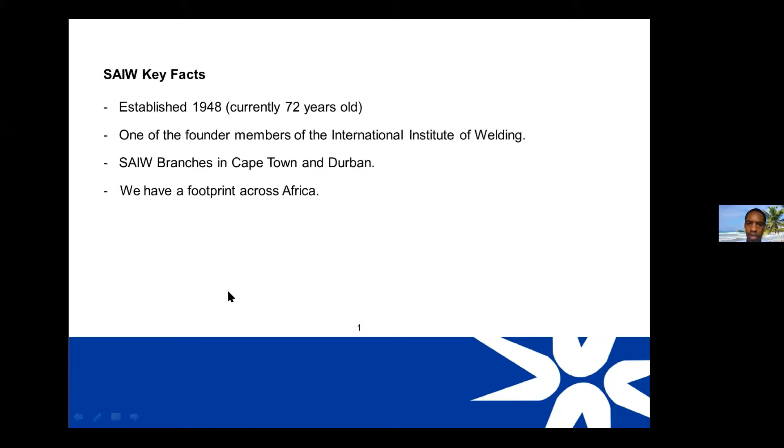Welding is basically a process where we are joining materials together, and depending on the situation or circumstances, it can be the same material or it can be different materials.

A number of products are produced in petrochemical plants, so different processes actually take place. Some of them require high temperatures, others require a low temperature, for those particular reactions to occur.

As such, the materials that are needed have to be appropriate for those particular operating conditions. And further to it, the chemicals themselves also have an effect on the material, because the chemical processes take place within pieces of equipment. So all these are things that have to be taken into account. When you start to weld, or when you're planning on welding any piece of equipment, you have to be aware of where you're going to make use of it.

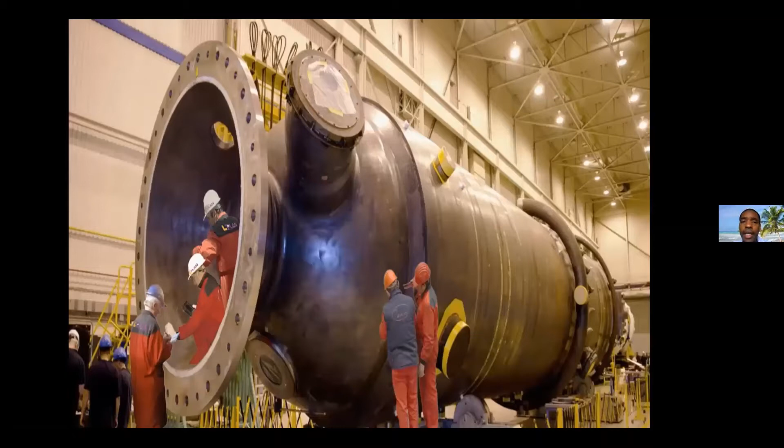If you think back in terms of the power plant and the petrochemical plants that I was showing you, all those are basically made up of various pieces of equipment which are built as a single unit and then connected together to form the entire plant, as I was illustrating earlier. So there's a lot of welding that takes place in workshops and manufacturing companies, and then they ship out those pieces of equipment to the different locations for use.

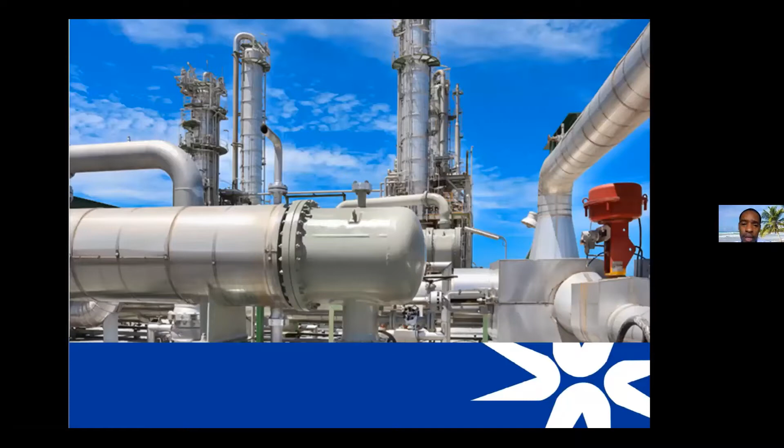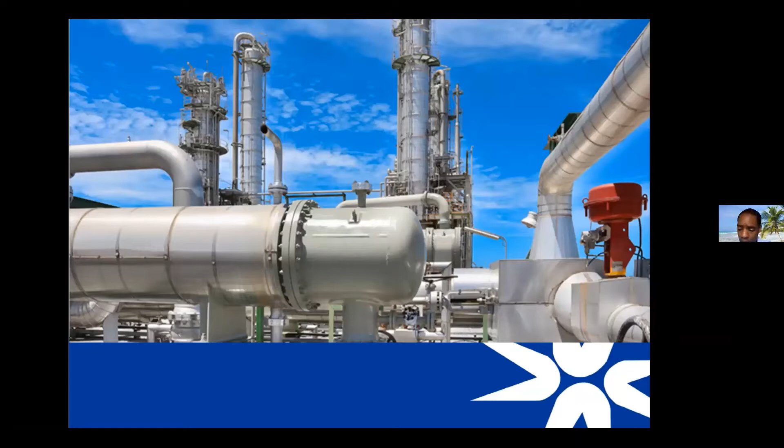If we zoom in a bit more into the petrochemical plant, you can see there is an illustration of a smaller piece of equipment that is connected to other pieces of equipment. And if I give you an X-ray view of this particular unit, this is what it would basically look like.

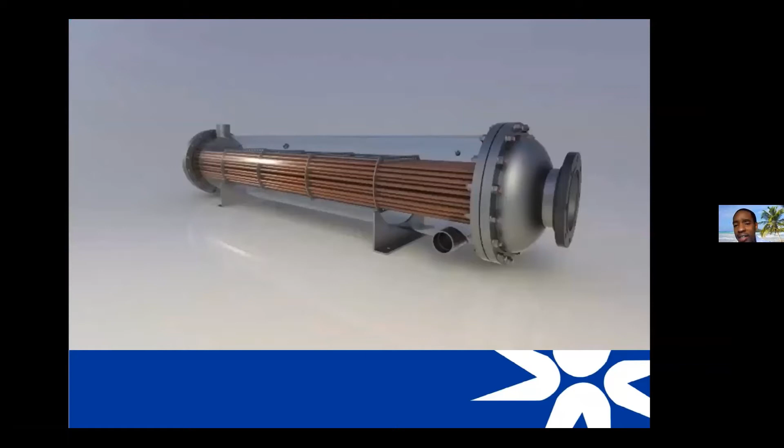As you can see, there's actually tubes inside. It's called a heat exchanger. And you'll find that with some of these pieces of equipment that are manufactured using welding, there are other bits of equipment which will also be inside the big unit itself.

So it means when you manufacture those various pieces of equipment, you need to know exactly what you are doing. You need to apply the relevant standards, you have to have an understanding of the materials, and you have to know exactly what needs to be checked to ensure that you've manufactured everything correctly.

In the motor industry as well, all those different cars that you drive, there's some welding that actually takes place there as well.

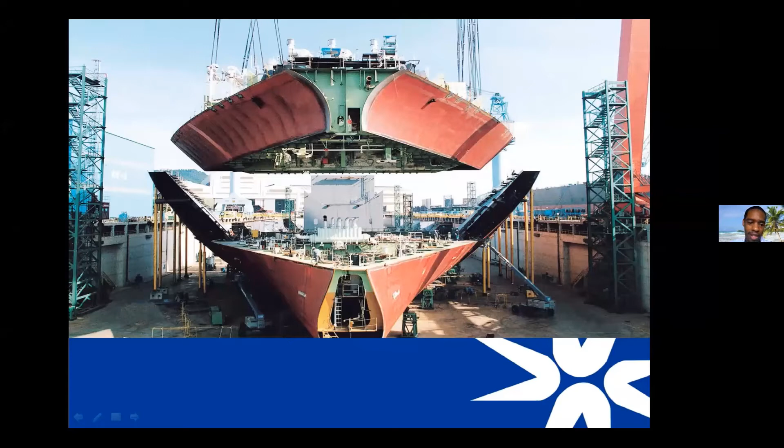This thing won't move. My slide doesn't want to move forward. Just give me a minute to try and get this going. Okay, I'll skip. All right, there we go.

So besides the transport sector, also when you look at buildings and structures in the structural industry, welding is used to manufacture some of these structures. When we think of structures, quite often you'll be thinking of a simple shed on a farm, but structures can be very complex, and there is a lot of danger in a structure not being made to the relevant standards, such that if something were to go wrong and that building were to come down, a lot of people would be hurt and killed. So welding becomes very critical. It has to be highly regulated to ensure that the products being manufactured meet the relevant standard and quality levels.

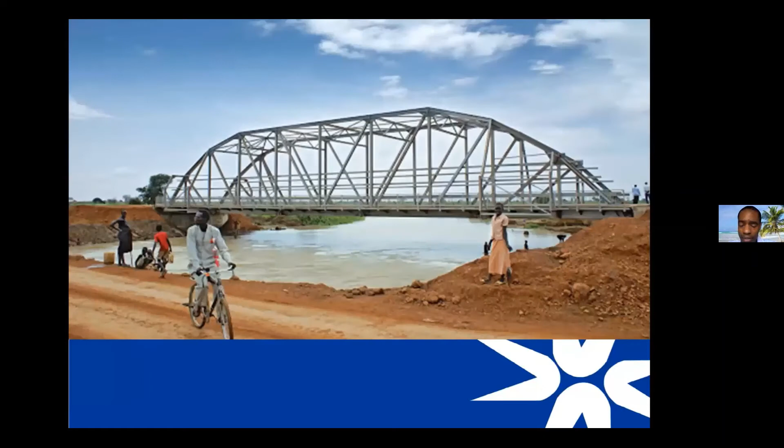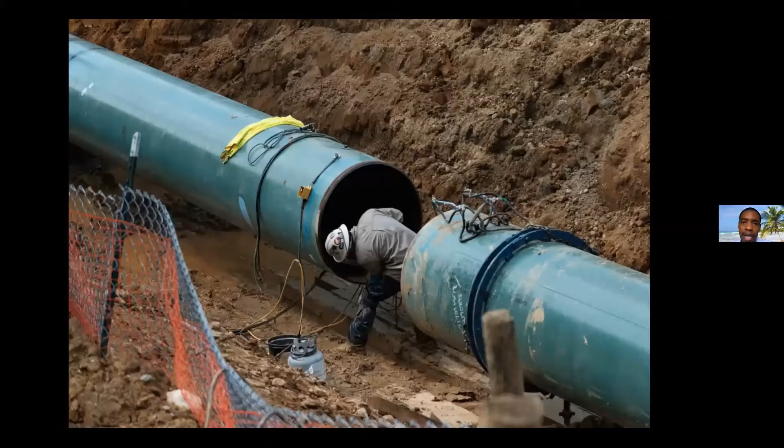Another example of a structure is a bridge that we've got here, made out of steel. And then again, we also use welding in the manufacture of pipelines. The great thing about this image is it brings to light another phenomenon related to welding, which is that we don't always weld inside a workshop. At times you can weld out there in the bush, like this example with the pipeline, where the guys are welding out on site.

So that basically is some examples of where welding can be used, or areas where you can find yourself working if you are involved in welding. And then in the field of welding, there are a number of options in terms of careers that people can actually pursue.

Before we delve more into the different options, I want to have a quick discussion. I talked about the petrochemical plant, where we were talking of the different temperatures, pressures, and chemical constituents that have to react within those pieces of equipment. So for all of that, you need engineers or designers, the ladies and gentlemen who will put a concept onto paper, and then that concept, or the drawings, the design, is handed down to a group of guys called the coordinators.

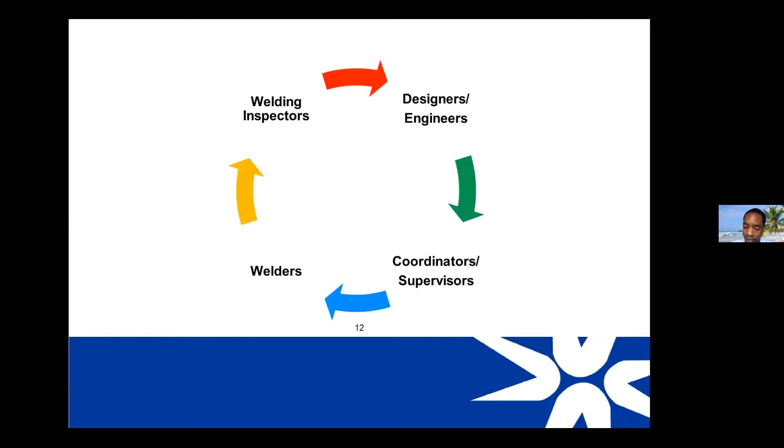So moving forward, I'll start off with the welding inspectors. At SAIW, we offer the welding level 1 and level 2 welding and fabrication inspectors. These guys' responsibility, as I've just been explaining, is to double check that everything has been done correctly.

They are more or less like a third party, an independent body that comes to say you have indeed complied with the requirements. And if things are falling short, they will also help you identify where you've fallen short and what corrections need to be made.

Okay, and we also have got an IIW qualification, which is the comprehensive level. It's also within the field of welding inspection.

And we also have got paint inspectors. With all those pieces of equipment which were manufactured, as you saw with some of the images, they're painted. So the quality of painting has to be right for the purpose of preserving those pieces of equipment from deterioration. The environments bring about things like corrosion, so you want to see to it that your pieces of equipment do not degrade much faster. They tend to have a lifespan that has been designed or built into them, so you want to guarantee that lifespan by putting up protective measures such as paint.

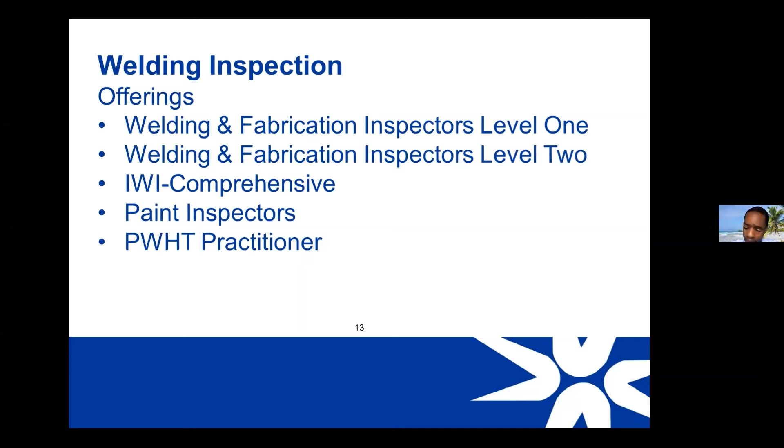Though you don't check for some of these things right at the end. I mean, it's a process. You start with it before the manufacturing actually takes place - that's where you go and check and verify.

Again, you want to see to it that the welders themselves are competent for the work that they are doing, so you want to see that they are qualified. And that qualification comes with its own restrictions. Being a qualified welder does not mean that you can go and weld up anything - there are limitations. The limitation can basically be the thickness that you can weld, or in terms of the material that you can weld, or the particular process itself that you can weld using. So those are all areas that the welding inspector goes to check and see that everything's been done correctly.

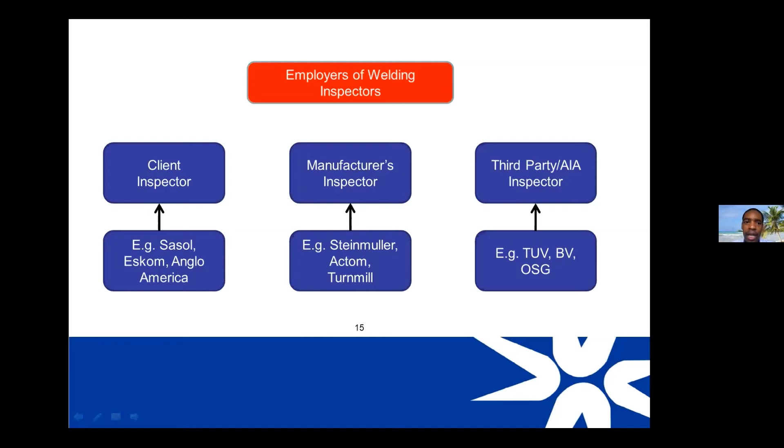And then you've got other processes like gas metal arc welding, which uses a continuous wire. It's a semi-automated process. The wire is fed by the welding machine, and it is the job of the welder to locate the arc in the right place within the groove, and to traverse along the groove at the right speed in order to deposit a weld of good quality, consistent thickness, consistent height and width.

And then you also have other processes like gas tungsten arc welding. We typically use this process for producing high quality welds, a typical example being small diameter piping and small thicknesses. It is ideal for depositing what we call the root run, which is the first layer of weld that we deposit when joining two materials together. The weld produced using this process tends to be of superior quality.

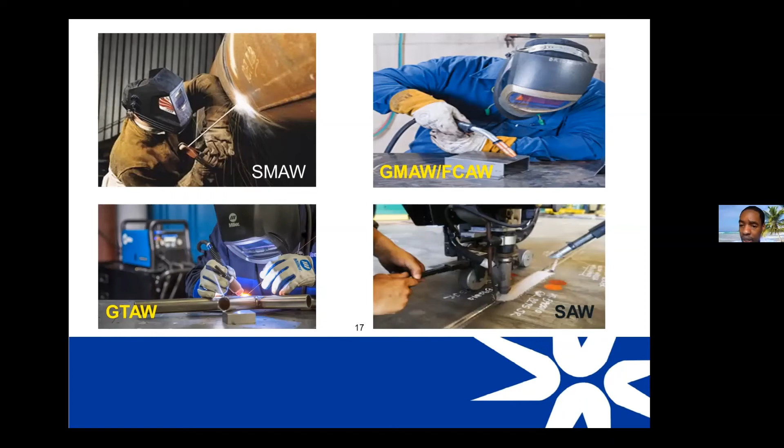Their responsibility is to simply set the machine. What current do I need? My wire feed speed, the voltage, and then basically see to it that this piece of equipment traverses along the weld, and to ensure that the weld is being deposited in the right place. Okay.

And then there's with welding. So with the other processes that I was showing you, you can always pursue another career which is a bit more niche, if I may put it that way, where you become an international welder. This has basically got 3 levels to it. The first of them being a fillet welder. So you basically specialize in depositing fillet welds. You can use any of the manual processes that I just showed you from the earlier slide.

And then you can further progress your abilities in terms of your skills to becoming a plate welder. And once you satisfy the necessary requirements there, if you wish, you can take it further to becoming a pipe welder, and you get a qualification from the IIW for all these 3. So you can be an international fillet welder, an international plate welder, an international pipe welder as well.

And these are IIW qualifications, but you are not only limited to getting an IIW qualification. You can also just be trained upon a particular welding need, to fulfill a particular mandate within your organization as well. So it can be tailor-made to suit your needs.

And then we also have what we call the international welding practitioner. This is one level up from the international welder. It's more a supervisory role or a coordinator type function, but a practitioner needs to be a qualified welder. They need to be able to weld. You can't be a practitioner if you cannot weld. It's very, very important that I emphasize the need to be able to weld.

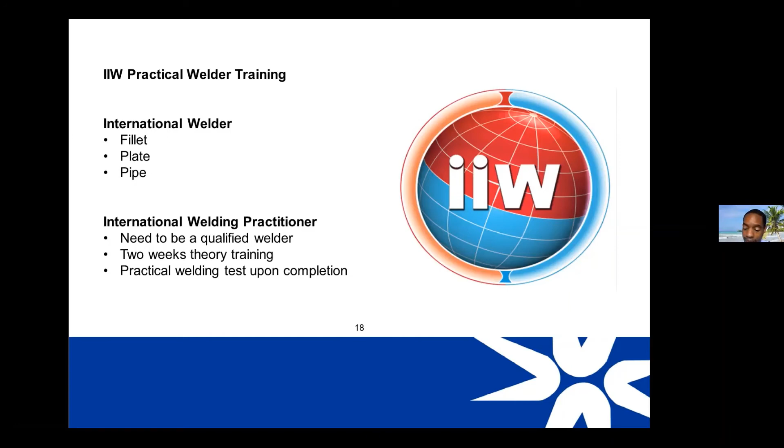So, if I may speak in very simple, generic terms, do you want to weld the boot? Do you want to weld the front door? Where exactly do you want to weld? Or is it somewhere on the sunroof? Just as an illustration. So you actually have to give the robot the instruction to be able to go and weld at those particular locations.

Okay, and then further to that, you then have to put in the welding parameters. What current should it be welding at? What voltage should it be welding at? Those sort of parameters. So that's another area that can be pursued in terms of welding careers as well.

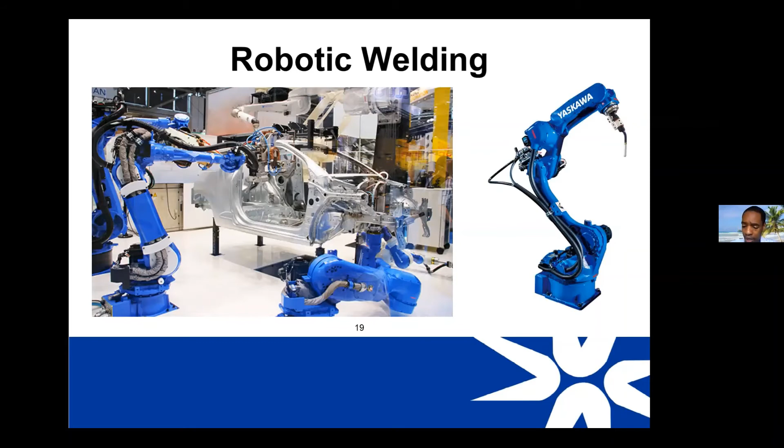So the welding specialists receive a whole lot more theoretical knowledge to be able to guide, so that they've got the adequate knowledge to make the necessary decisions on the shop floor in terms of the work that they are handling, in terms of addressing the welding challenges that they may face. So it is actually a good tool for anyone that wants to supervise work on the shop floor to resolve welding problems. This is a good area to actually pursue.

And then we also have got the international welding technologists, and these guys receive an even more superior level of theoretical training regarding welding technologies. So they get to have a much broader understanding compared to the specialist and the practitioner in terms of the different welding processes, the challenges that you encounter using different processes, and how you can go about resolving those challenges.

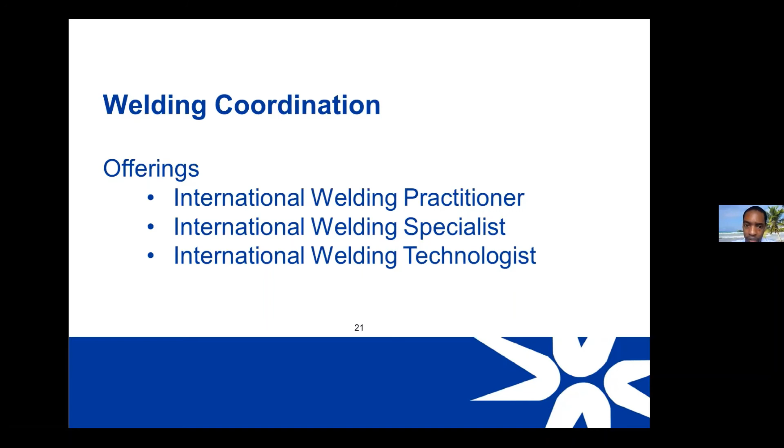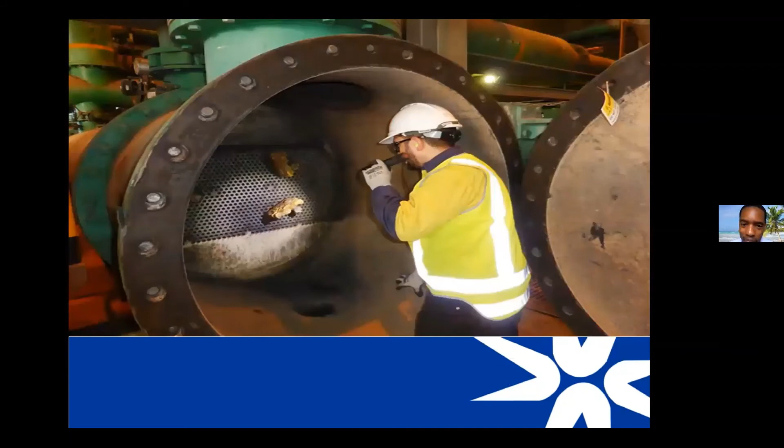Okay, and then when these pieces of equipment have been manufactured and put into service, one thing is definite, which is that they are going to deteriorate. There is corrosion that is going to take place. They will not always remain in that brand new state they were in when we manufactured them. So we have to check every now and again to see to it that these pieces of equipment are still able to keep functioning. So you find that there's something called a minimum thickness, as an example.

This is important because the piece of equipment was designed to withstand a particular pressure and a particular temperature. So if it goes below that thickness, it is no longer structurally sound to withstand the operating conditions, meaning that it becomes a risk.

For example, it can actually explode. Okay, and then it becomes an accident which potentially damages the plant. It can potentially hurt people, the environment, and also others. It can potentially kill people as well. So it becomes important that whatever goes into service, it also needs to be checked while in service.

And in South Africa, you find that there is a law which actually regulates all of this. It requires that every 36 months, pieces of equipment which operate under pressure need to be stopped, opened up, and you let a group of people go in there to inspect these pieces of equipment and check and see to it that they are still capable of operating in a functional, sound and safe manner going forward.